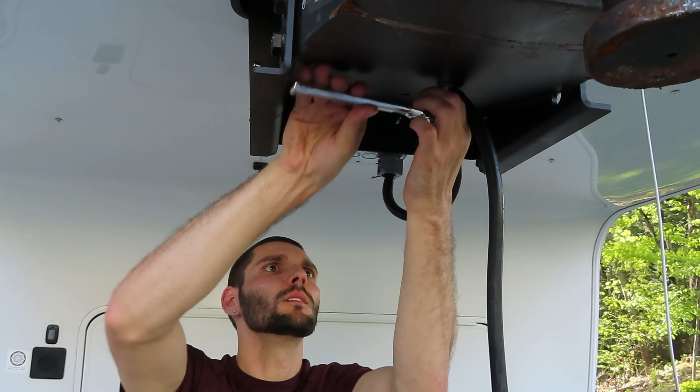So today we just got our Reese Goose Box Generation 3. It's the 20,000 pound goose box, and we're going to be trying to take off this pin box. So let's get to it. We're going to start by detaching the cable hanger for the power cable, as well as the emergency brake cable.

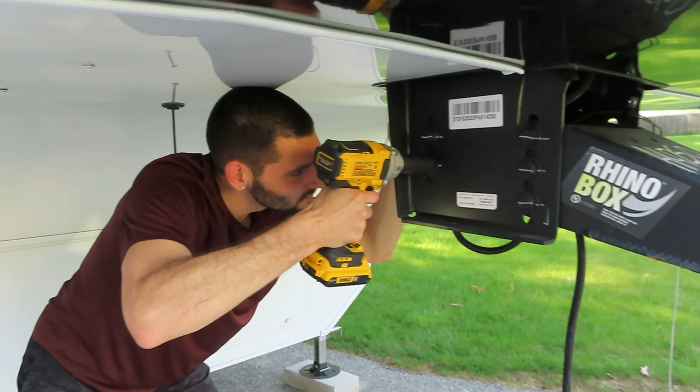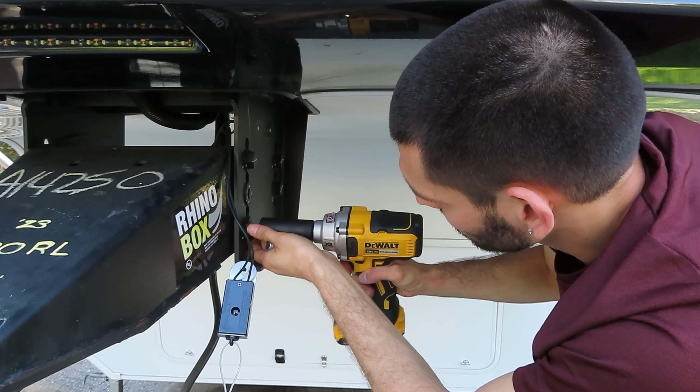Once all cables and accessories are removed from the pin box, we're going to go ahead and remove the bolts holding the pin box in place. We decided to go ahead and remove all but 2 bolts, 1 bolt on each side. Once we had all but the last 2 bolts in place, we backed up the truck to catch the pin box. Once the truck was in place, we went ahead and removed the last 2 bolts.

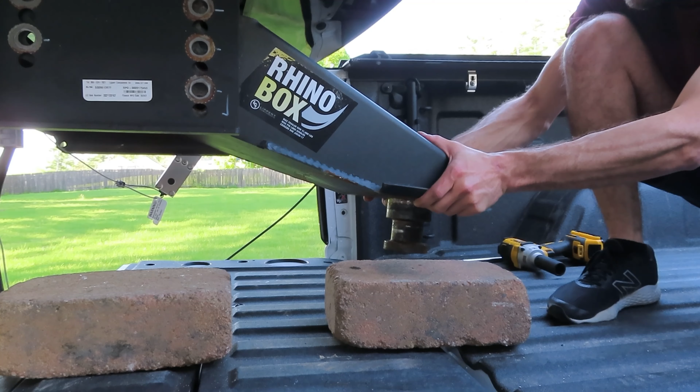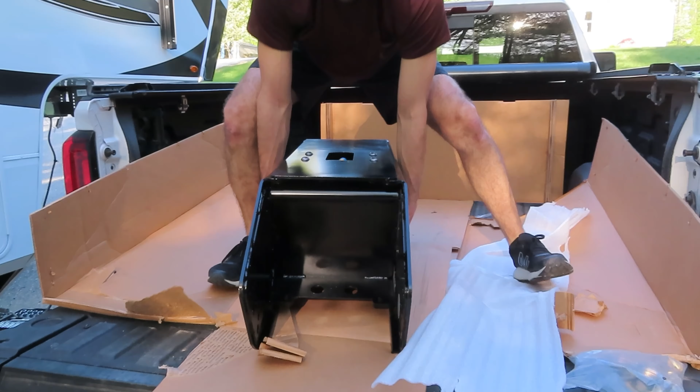At this point, we had to shimmy the pin box loose because it was stuck in there pretty tight. This Rhino box was a lot lighter than I originally anticipated. Next, we loaded the new Reese Goose Box into the bed of the pickup truck and unwrapped it. Once we had it unwrapped, we decided to put blocks underneath it to align it and orient it.

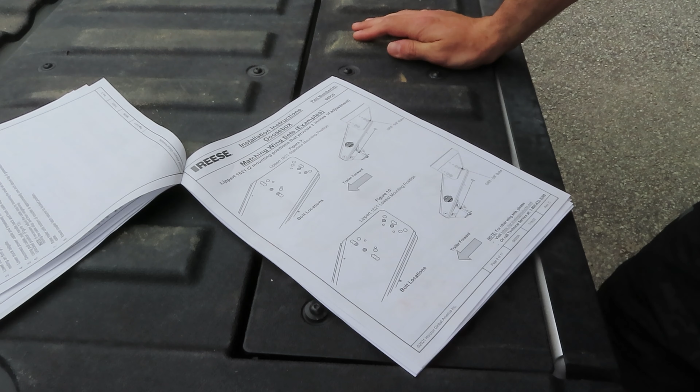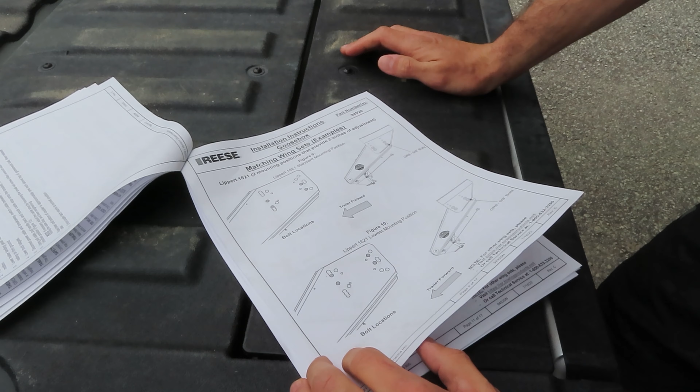So for us, we got the Goose Box Generation 3, and it comes with this set of instructions. As you can see, we are trying to figure out which mounting hole pattern is going to be best for us. So as you'll see, they list if you have a pin box, which is the Lippert 1621 on your rig, you'll have actually 2 options for mounting the Goose Box. They differ about 2 inches vertically. They also have a setup here if you have the Lippert 1716, again with 2 different orientations or positions.

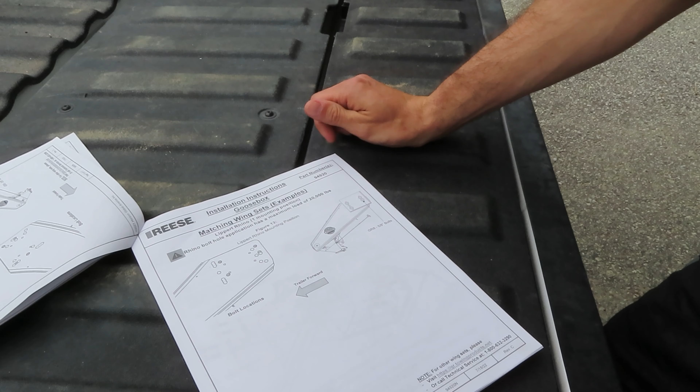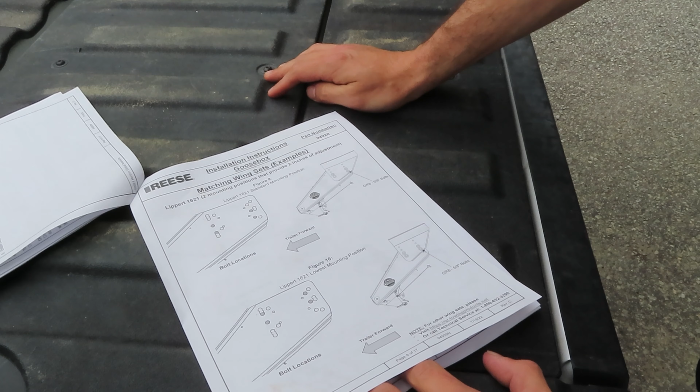And then finally, they have instructions on how to mount the Goosebox if your rig comes with the new Rhino bolt hole pattern. So we actually thought initially that we had the Lippert 1621. When we went to go install it the first time, we found out the bolt holes weren't lining up, and we did a little bit more research. Again, this is our first rig, so we're learning as we go here. Found out we actually have the Rhino bolt hole pattern, so we only have 1 orientation, 1 position.

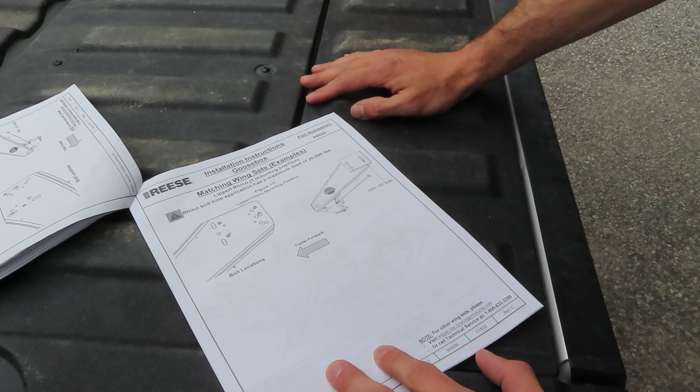And our concern is we have a very steep driveway. It's about a 14-degree downward slope, so it's a very quick transition to the road, which is flat up above. And when we were actually getting the trailer down here, borrowing a family member's vehicle, we were pretty much bottoming out the bed rails on the bottom of our upper deck here.

So our concern is with the Rhino bolt hole pin box that we have on our rig, we only got 1 position, so we don't have that much space for play vertically. And it's really going to come down to which ball we're able to put inside of our bed, as well as what truck we go with. We're going to be looking at a 3500 GMC HD pickup truck. It's going to have a long bed. It's going to be a dually. We'll save that for another video, talking about how to pick the right truck.

But for us, we heard a lot of stuff about the B&W ball, and a lot of good reviews on that. It's a taller ball, so we're hoping that it'll give us the 7-inch clearance that we're going to need between the bed rails and the bottom of our upper deck. So stay tuned for that.

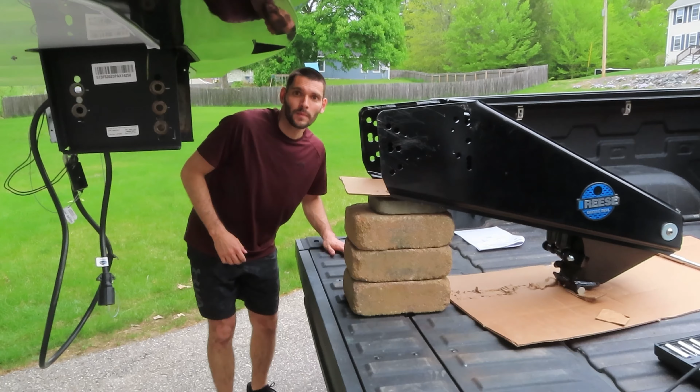So we got the Goosebox set up here on the back of our truck. We're going to use this to move it around, so neither one of us, because there's only 2 of us, has to try to stand here and hold this 200-pound beast. So as you can see, our camper's a little low at the moment. We're going to go ahead and raise it up, back the truck up right underneath it, and then lower it back down. We might have to put a couple more blocks under here to help level out these holes, because we have the Rhino box.

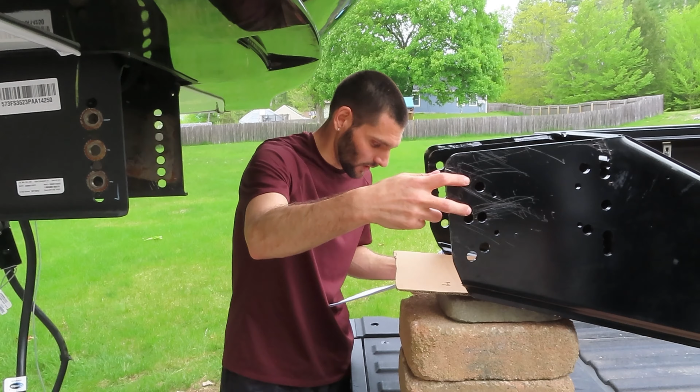The hole pattern that we're going to be using are these upper 2 back ones and these ones here. So we're going to be lining those up with this bottom hole, and then the rest of the holes will line up, and that's where we know where we're going to be putting our bolts. So we're going to go ahead and raise our camper here, turn on the leveling system, and go ahead and press up. Takes a bit, but we'll get there.

One thing we forgot to point out to you guys, because we kind of learned the hard way, is our camper is set up here, so we already had it auto leveled, and we noticed that when we were about to go raise the front of the camper up, we hadn't actually retracted the back jacks yet. So you might want to go ahead and retract your back jacks so that as the front comes up, you're not lifting your tires off the ground. Pro tip.

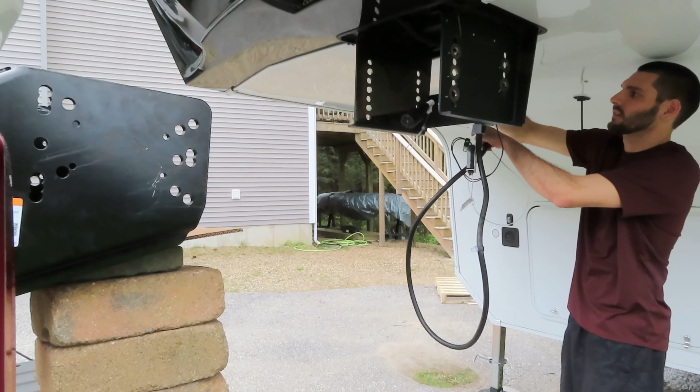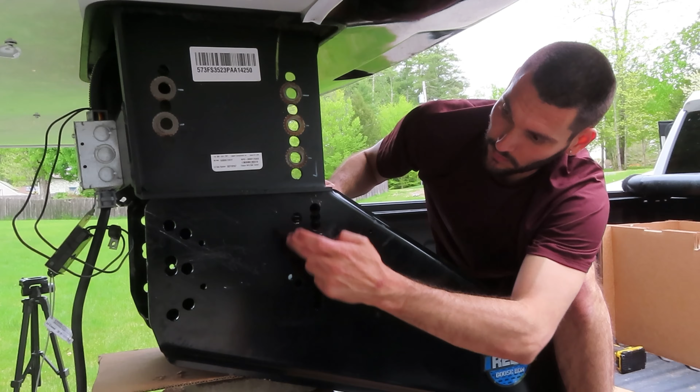Keep going. Keep going. Good. So again, we got the Rhino box. So we have to line up these two holes with the top and bottom ones that were there already previously. And then in the back here, we're going to be lining up these two top ones in the positions that they were previously mounted before.

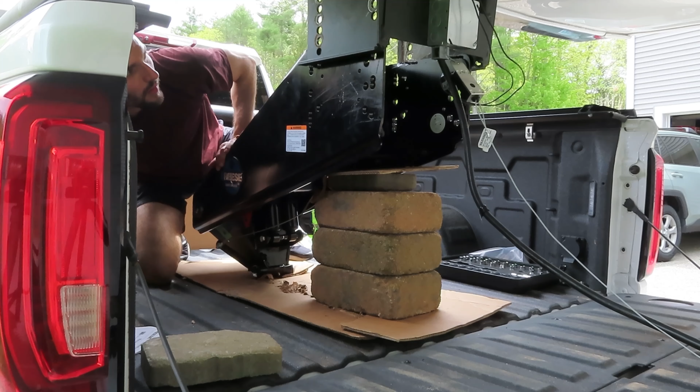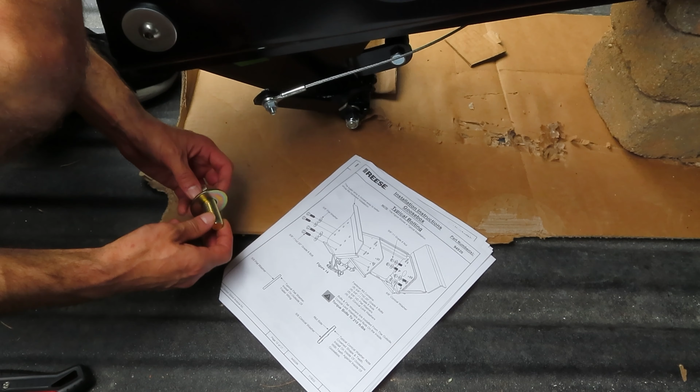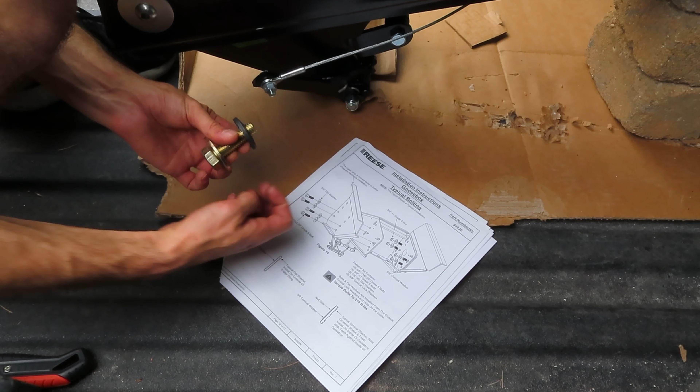So per the instructions, we need to put this flat washer all the way onto the bolt, and then the bolt is going to go through our pin box, which is then going to go through the goose box, and we're going to have this conical shaped washer. And according to the directions, this serrated side you want pressed in against the inside of the goose box, and then your nut goes on.

So we're going to take our washer and put the serrated side in towards the goose box, and then we're going to take our nut and bolt that on. And all we're trying to do here is get these first two lined up so that we can allow the entire goose box to hinge on these two, and we can align all the other bolt holes.

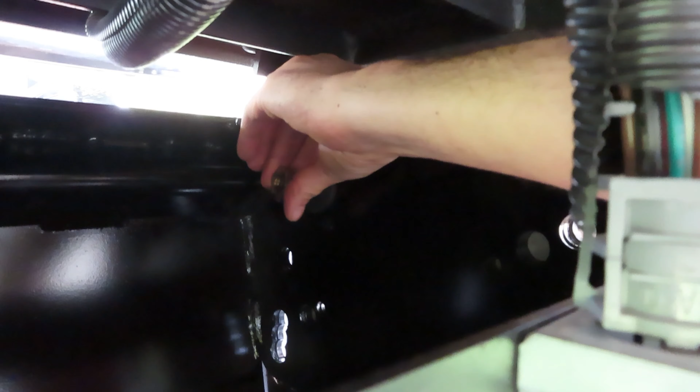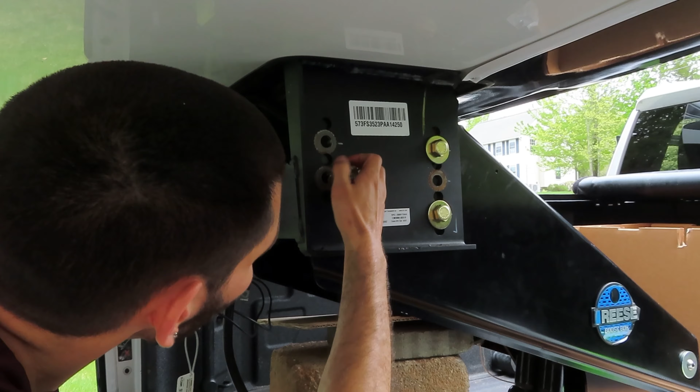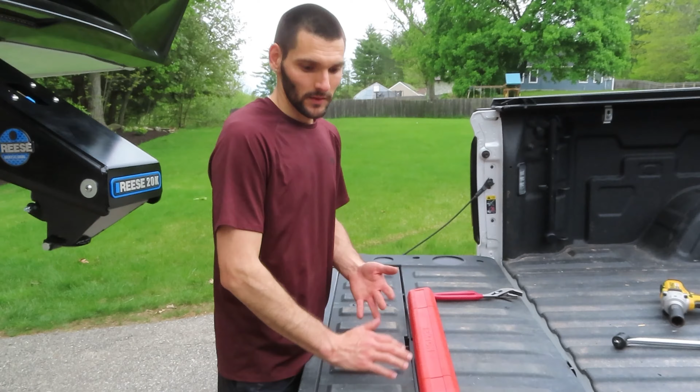So now that we got all the bolts in, we're gonna pull the truck up out of the way. The goose box will be hanging inside of the pin box. And the next step is to torque these down to 210 foot-pounds. So per the instructions, we gotta torque these down to 210 foot-pounds. So we got our torque wrench here. It's capable of going up to 250 as the instructions state.

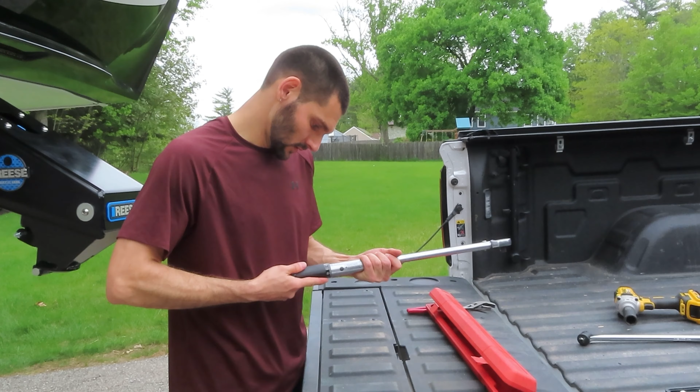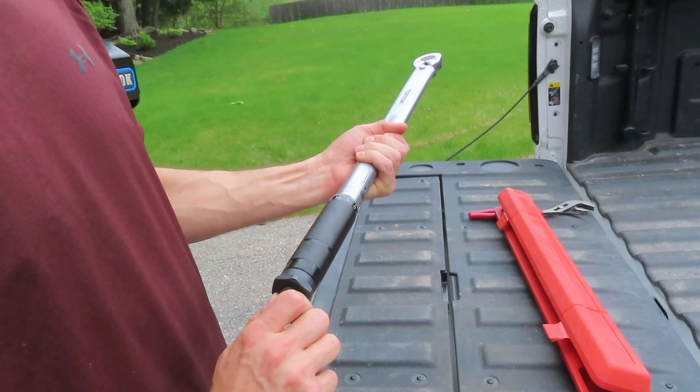So we're gonna go ahead and line this up to 210. It's 200, 210. Go ahead and lock it down and get at it.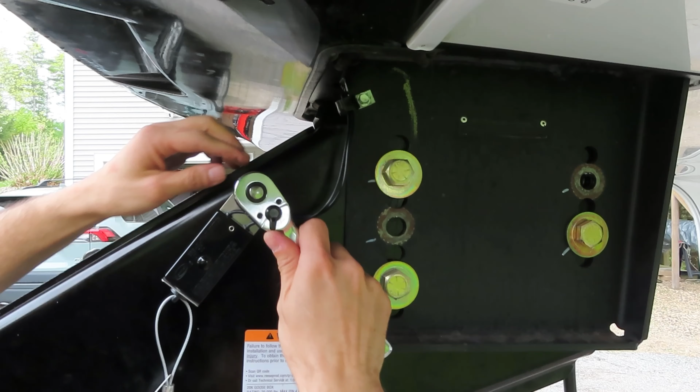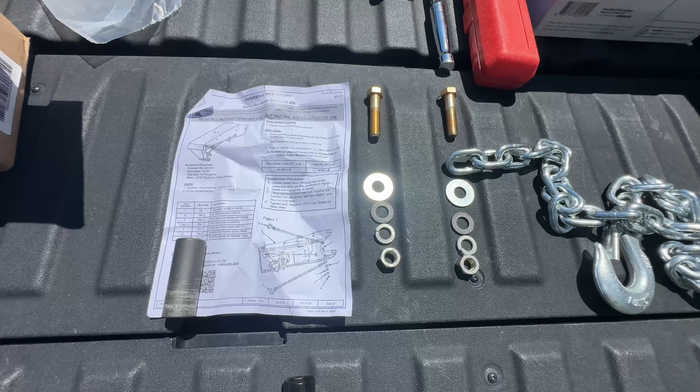All right, it's time for safety. We got to install these safety chains. All right, let's take a quick look at the instructions here. So you're gonna need a 13/16 wrench, as well as a 13/16 inch socket and torque wrench. Torque wrench is gonna have to be able to go up to 110 foot-pounds.

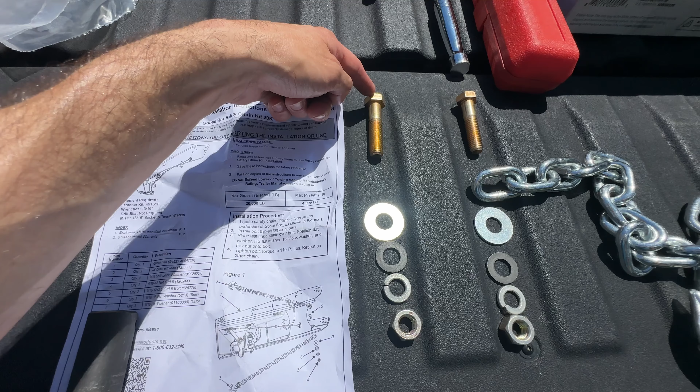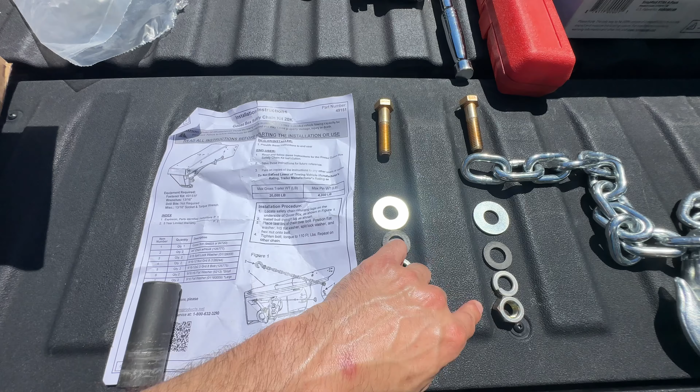Looking at the diagram here, this is the underside of the goose box, and we'll show the actual thing in just a moment here. So on the underside of the goose box, there's these lugs, and you're gonna drop the bolt in from the top down through the lug in the goose box. Then you're gonna take the last link of your safety chain, put that on the bolt, followed by the large washer, small washer, lock washer, and finally the nut. And then you're gonna torque it down to the 110 foot-pounds.

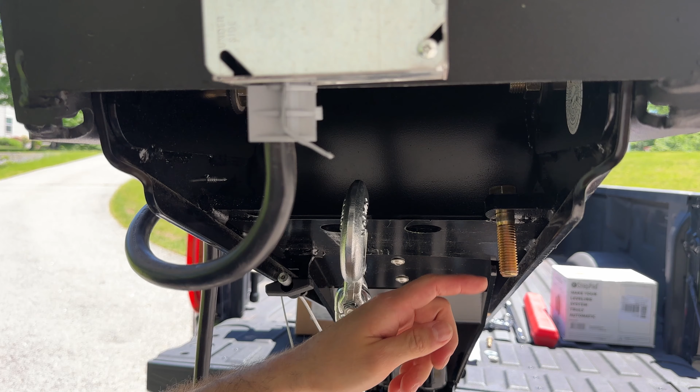So I'm gonna start by just hooking in the safety chain so it's up out of the way for now. I'm gonna take the bolt, I'm gonna drop it through this lug under here. We're gonna take the last link of the safety chain and put that on. You're gonna aim it slightly inwards. Take your large washer, your small washer, your lock washer, and finally your nut.

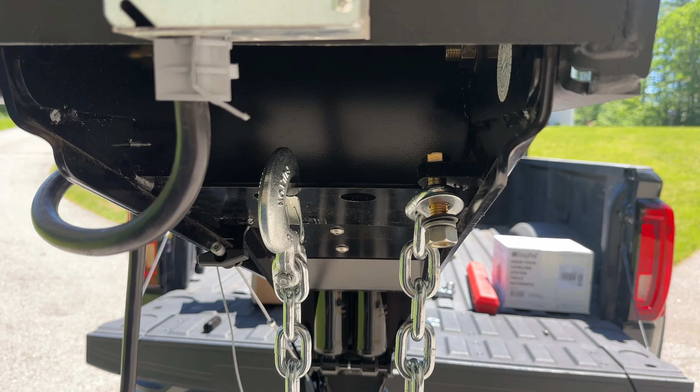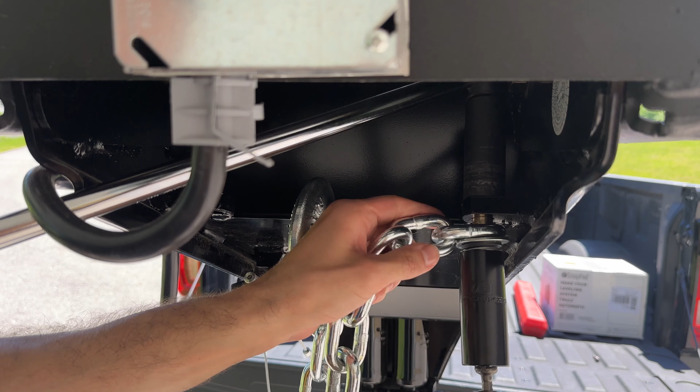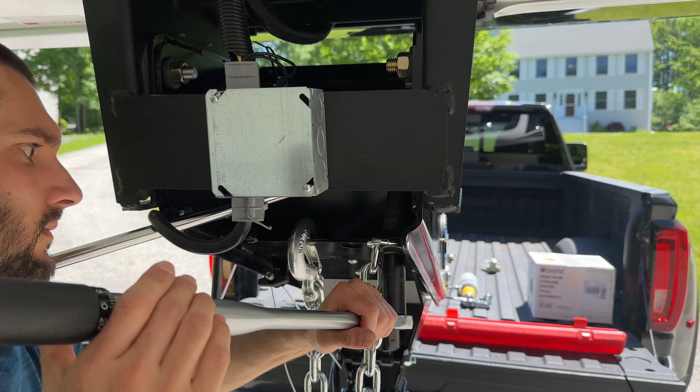So we found that the bolt is truly a 13/16. However, the nut we found is really a 7/8. So just keep that in mind here. So I'll grab my torque wrench and we'll torque it to spec. So we got the torque wrench. We set it to 110. And there you got it. And now we're just gonna repeat this on the other side.

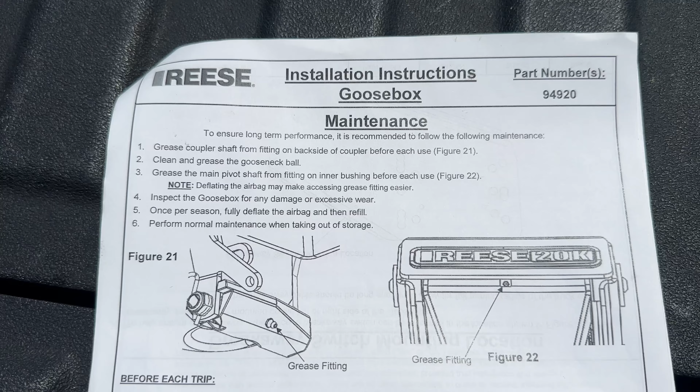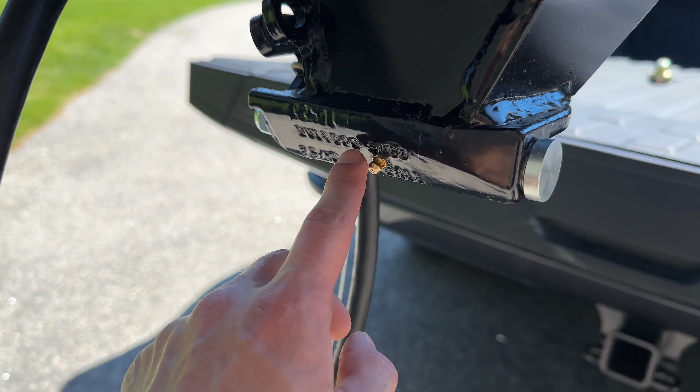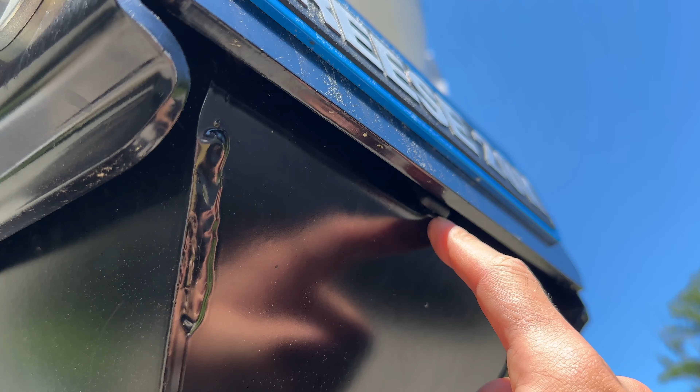And finally, we have to make sure that we grease the coupler shaft as well as the main pivot shaft. So we'll show you on the actual thing, but the coupler shaft is right here on the back. This one's easy to see and get to. The one that most people struggle finding is the main pivot shaft, which from this angle, it's actually up under here. There's this little cover that you have to pop off. The best way to get to it is to actually couple up with your truck, deflate the airbag completely, and then it'll expose itself. So we'll show you how to do that in just a moment.

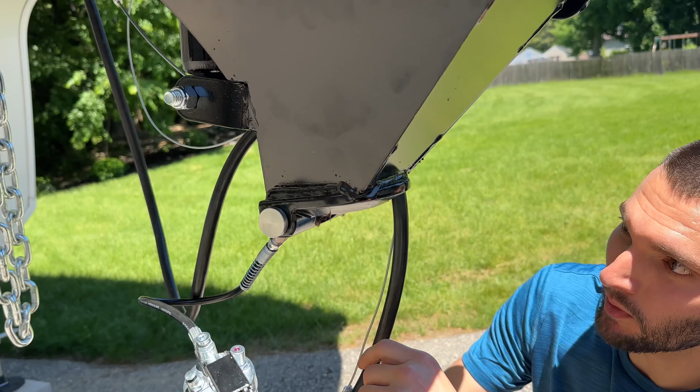So you're gonna grab your grease gun and pop it onto that Zerk fitting there. You're gonna give it a couple pumps. I've already done it, I'm not gonna do it now. But what you really wanna pay attention to, if you come over here, is as you're pumping the grease in, you'll start to see the grease coming out here. So keep an eye on this side. That way you don't over grease it.

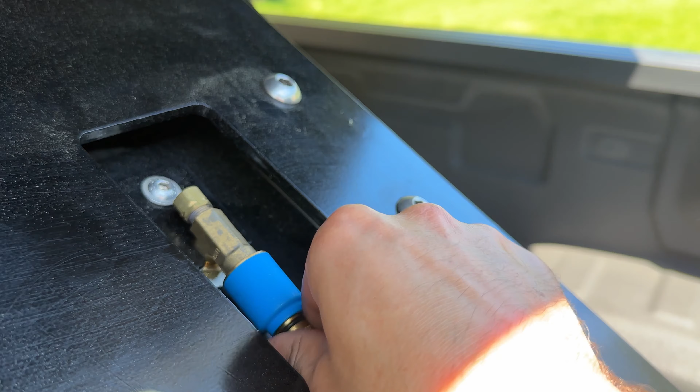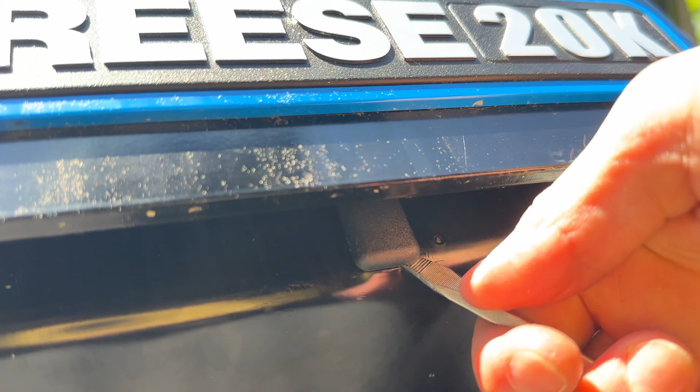So now we're gonna try to get to this main pivot shaft, which again is up under here. So in order to have it expose, we need to come up here. We're gonna unscrew our cap and we're gonna deflate the air in the airbag. So you'll see as the airbag deflates, that main pivot shaft starts to show itself. And once you get enough air out, you can take a flathead screwdriver and just pop it right off.

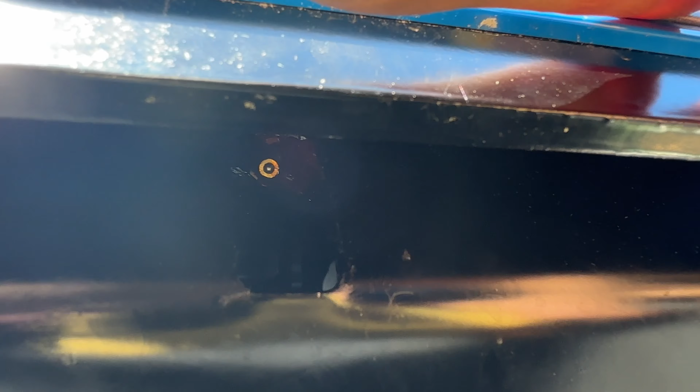And there's the fitting. So again, you're gonna take your grease gun, you're gonna reach up into there, lock onto it, give it a few pumps, and you should be good to go. So now we got it all greased, we're gonna put the cap back on.

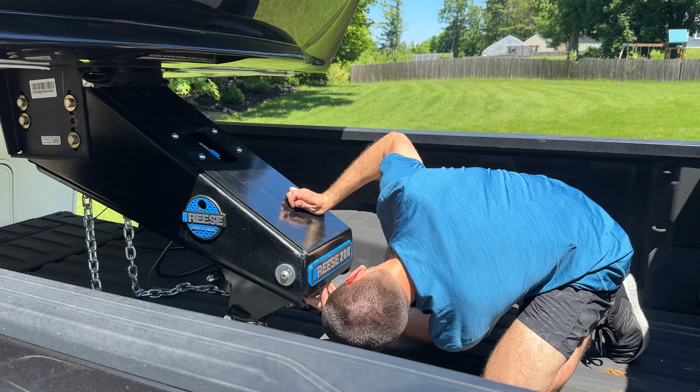And then now we're gonna air up the airbag, and in the instructions it's going to tell you to have two people. One person is going to be in here putting air in, the other person is going to be looking from the side on into this hole right here, and there's going to be a bar that's going to come down, and once that bar is lined up in the middle, that's how you know you have enough air.

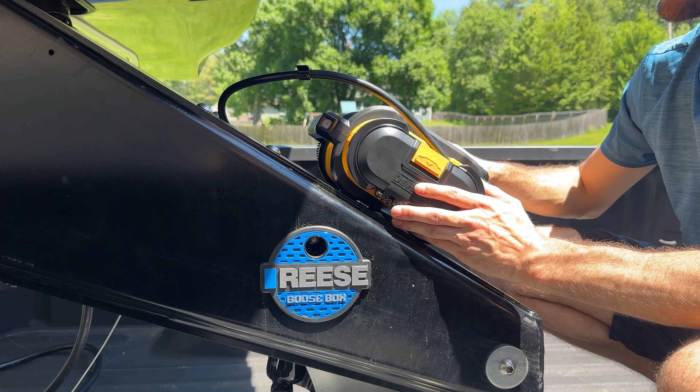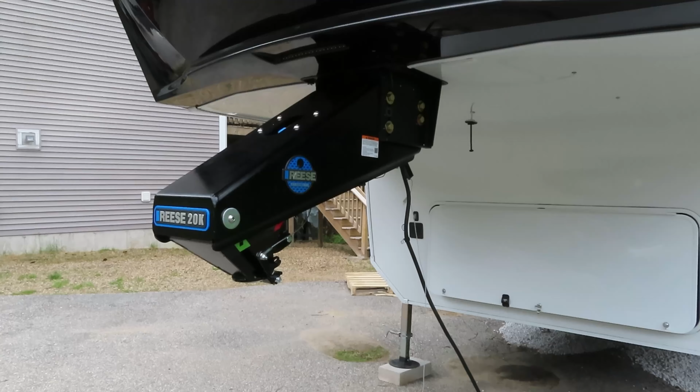So we got our pump hooked up. We found that using a cordless pump is so much easier, so if you don't have one, consider getting one. So as you can see, that bar came down, it's directly in the middle, and that's how you know that you have it aired up proper. And there you have it, the Reese Goose Box Gen 3 gooseneck installation.